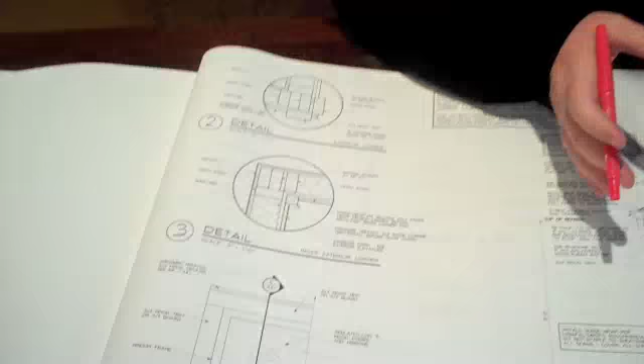Then we get to my A4 sheets, and this sheet here is all the sections and details for your home. They have to be customized and tweaked for your particular condition. Sometimes I'll have sections that have part existing work, and sometimes sections that's all new work.

Here's the new two-story section in the middle, and over here we have the one-story garage section. Then these are details to get the new part to kind of resemble the existing part of the house. I do not have wood pieces custom milled to match exactly the historic house.

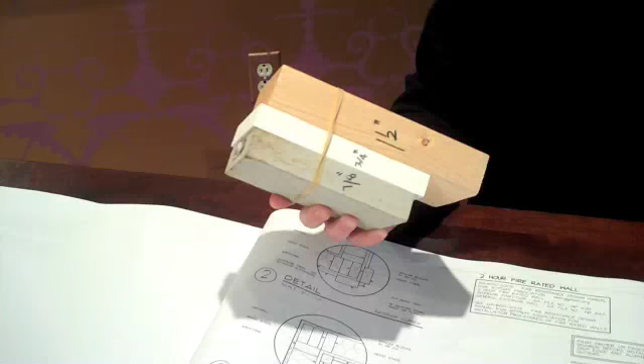You kind of want to know that that was a new part added onto the back of the house. Also, it costs a lot of extra money to have something milled to exact specifications. What I do is take materials you can find right off the shelf and design them in such a way that it resembles the historic, but not totally exactly the same. So you save money, you get the look, and we use the best of man-made products and wood products. I do a combination of both.

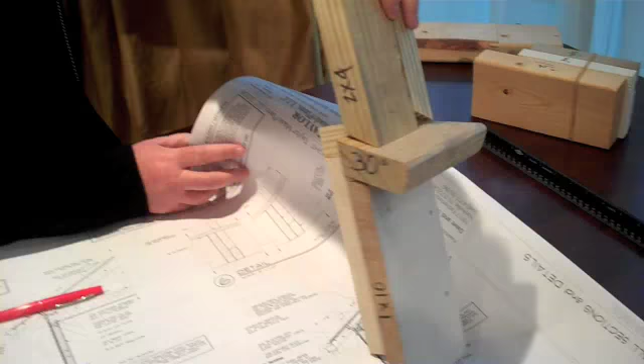And here is how I get a skirt board. This just kind of shows you how we can put the things together. That's what details are in my drawings, to show how to get this historic look on your home.

I also have some more contemporary style homes, so we can add a more contemporary feature to the back of your house by just changing these types of details out on the drawings.

Here's some more details. This house had a porch, so usually I'll have a porch sheet with more porch details or trim details. As you can see, this is all the way you would want to replicate the historic detail—not exactly, but with modern materials, so you're not doing a lot of customization.

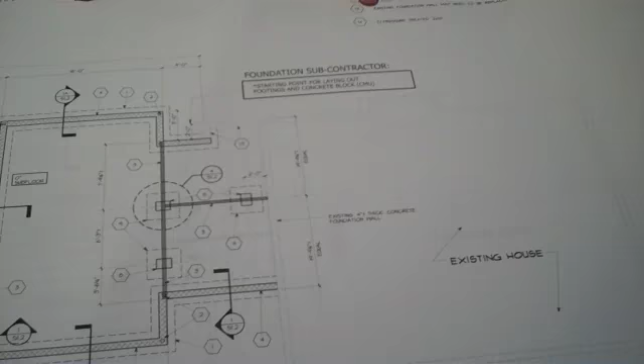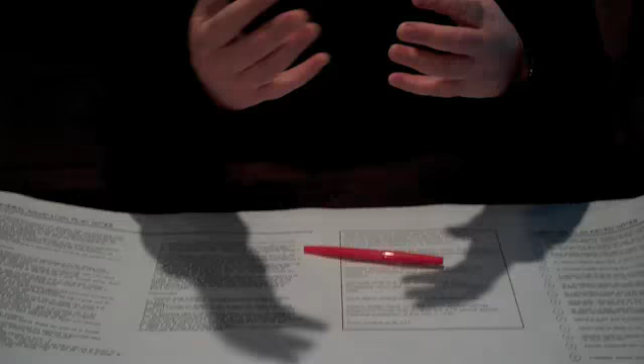Then we get into these S sheets, which are the structural drawings. I'm not required by law to have a structural engineer review any drawings, or to create any framing plans. You may have seen drawings, or purchased drawings, where there was no framing plan and no foundation plan. I feel it's really good to go ahead and have these things done and have an engineer look at them. I have a Tennessee engineer look at the drawings.

They make sure the footings are sized properly, beam sizes, and make sure the framing is going to work. So I'm looking at laying out the frame in an efficient way. Sometimes we've got to think about mechanical systems going through the floor, and plumbing, and how you're going to get that up and down. So I provide a foundation plan, framing plans—that's the floor, ceiling, roof and wall framing—and footing details.

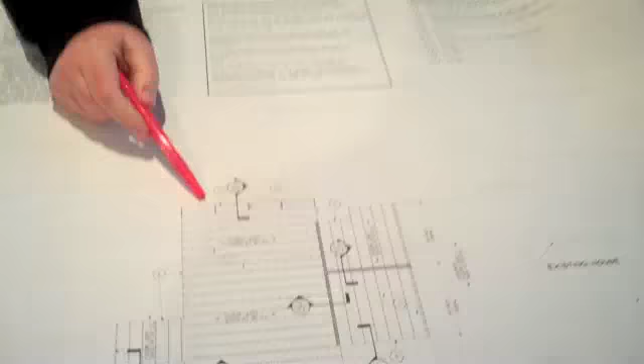So this is the foundation plan here, and this is the first floor framing plan. This is the grade back area of the existing house, and how that is going to connect onto the existing house. Then here are the framing and foundation details for this particular job. So I customize them to fit your house.

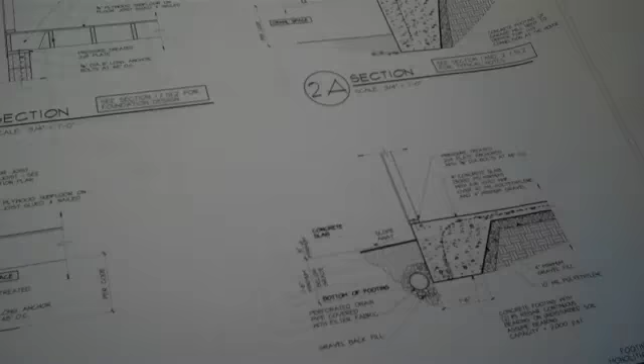Again, I have a structural engineer look at it. Not required to, but I think it's in everybody's best interest—my liability, your house longevity—so there's no sinking or sagging beams and that kind of thing.

A lot of times we see beams that have been undersized because someone on the job site was just sizing the beam or whatever. And also with historic houses, it's just not the size of a beam—you've got to look at the entire house, especially when I'm doing these vaulted ceilings and wide open spaces. It's really looking at the whole framing package and how it all plays and works together in a house.

Here's the first floor ceiling and the second floor framing plan, with some details here. We were trying to save some headroom height, so we had to be a little creative with some of our framing details and beams, up beams, down beams. So I had a little thought process there on getting that dormer connected to the new part.

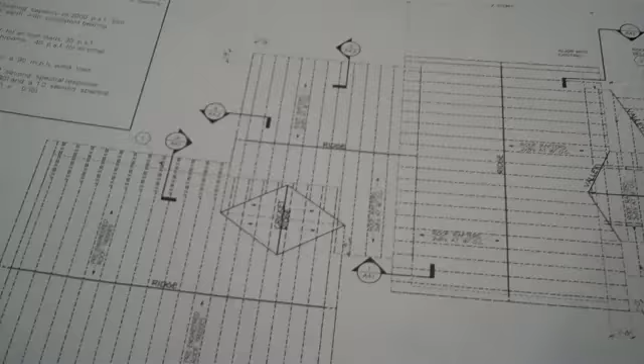And then here's the roof framing plan, showing your ridges and valleys and those kind of things. Here we're connecting the new roof right over to the existing roof, your existing ridge here. Again, the existing work is screened back to show the difference so you can see exactly how it's all going to work together.

So it's a very thorough, very detailed set of drawings. This process takes several meetings with the client—like 3 or 4 meetings in the schematic phase and about 2 to 3 meetings in the construction drawing phase.

And if I'm involved with a historic commission or anything like that, then that adds a little bit of time. Usually you have to send in your drawings and be approved, going through a staff meeting and then a commissioner meeting.

So every project's different, and this is a large addition, so there's like 10 or 12 sheets or something like that. If you were doing just an attic build-out, you might have 2 to 3 sheets. If you were doing just an interior renovation, you might have just 2 sheets. So it's a little different for every project, but this is giving you the whole large package that you would get with a full large addition and renovation.